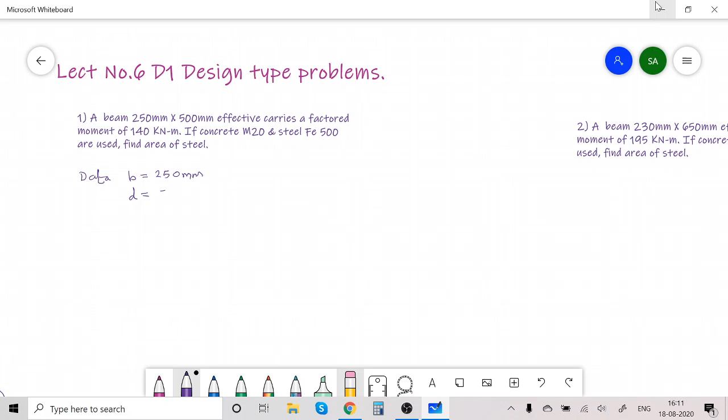Now in the first problem, it is given that a beam is 250 mm by 500 mm effective. So data: B equal to 250 mm, and as the effective depth is given, we will write small d equal to 500 mm. It carries a factored moment of 140 kilonewton meter. M20 grade concrete, that means FCK is 20 Newton per mm square, and Fe 500 means Fy is equal to 500 Newton per mm square.

The requirement is to find AST, area of steel on tension side.

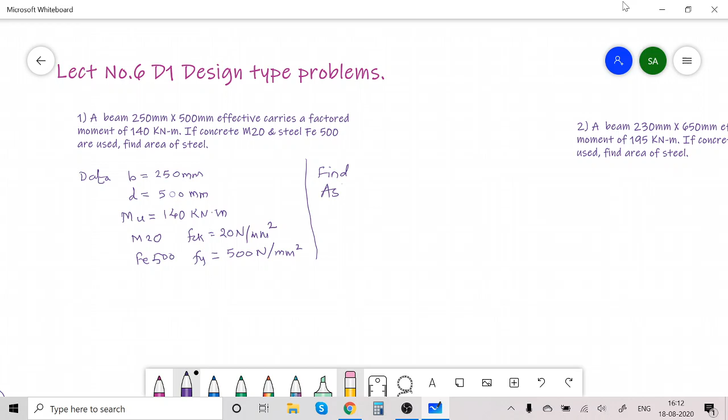Now, first job is to check whether the given section is carrying moment, that is 140 kilonewton meter, less than mu max or not.

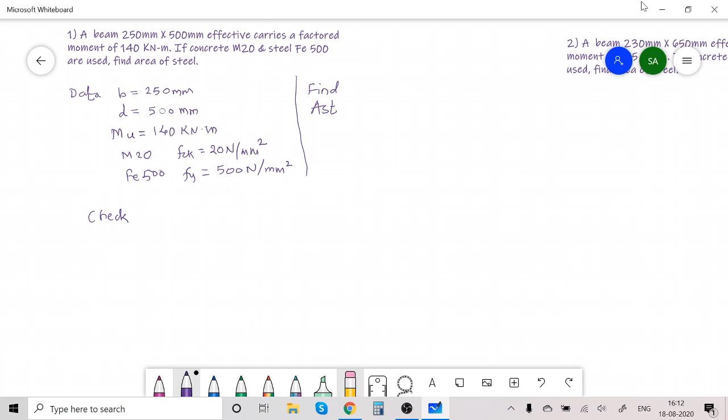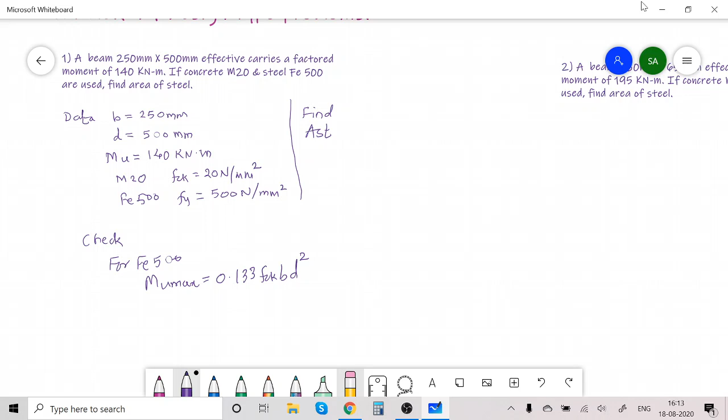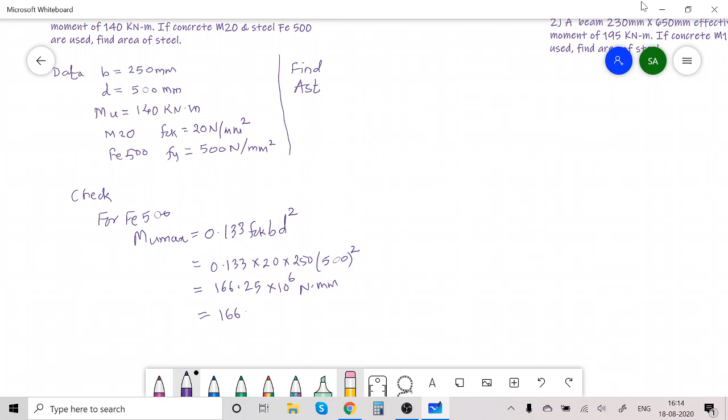For Fe 500, the value of mu max is 0.133 FCK BD square. This is the design constant for moment that we derived in our second lecture for Fe 500. Substituting the values, 0.133, FCK is 20, B is 250, and D is 500 mm square. After calculating, we get the mu max value as 166.25 into 10 raised to 6 Newton mm, or 166.25 kilonewton meter.

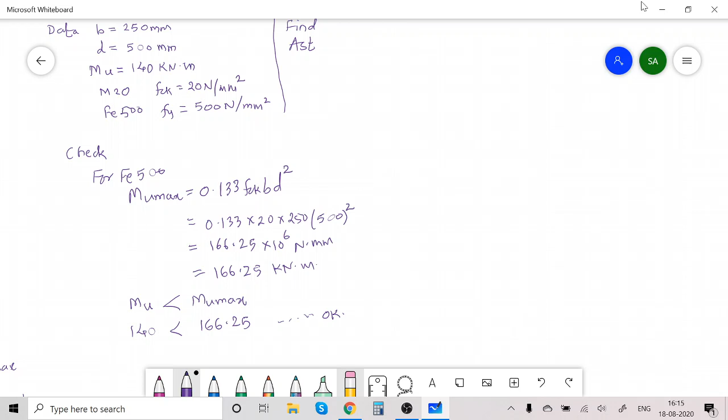Now the actual bending moment acting mu is less than mu max. That means 140 kilonewton meter is less than 166.25 kilonewton meter. So this is okay. If this mu is greater than mu max, you will have to redesign the size of the beam so that it will be under reinforced section only. Remember, the mu should not be greater than mu max. This is the meaning of mu max: the moment acting on the beam should not be greater than mu max, it should be less.

Now there are two ways to calculate AST. You can select the method that you feel easier. So method 1, I will explain the method of calculating the value of AST.

Now we know that XU is equal to, using that equation, CU is equal to TU. In this we know that 0.36 FCK XU B is equal to 0.87 FY AST.

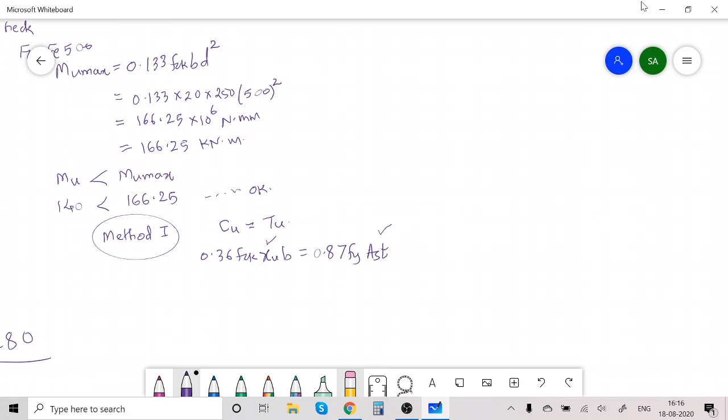Now here, as AST is not known, XU is also not known, remember, because XU value depends upon the amount of area of steel. Both are not known. So what I will do is find the value of XU in terms of AST.

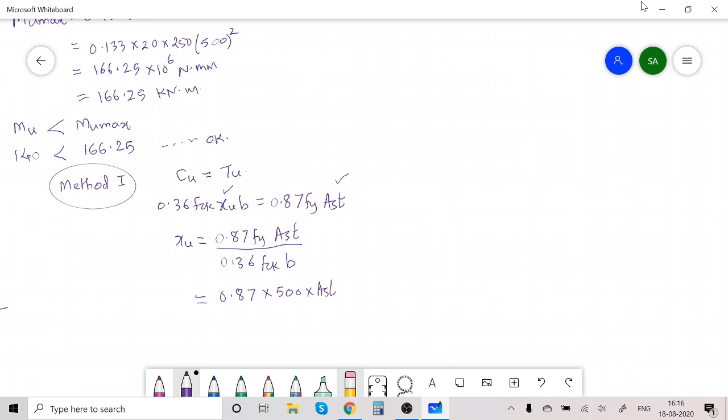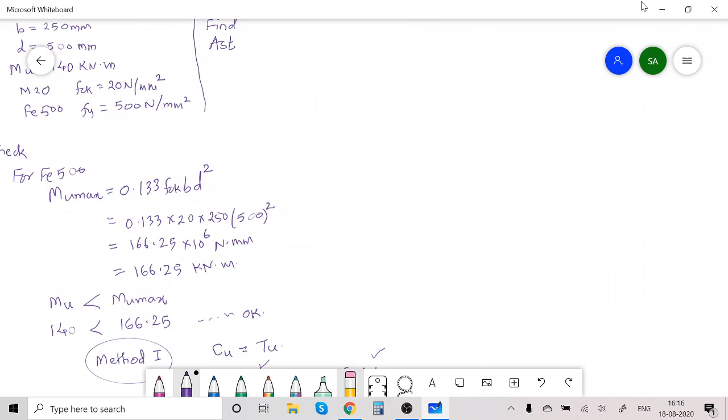So XU equals 0.87 FY AST divided by 0.36 FCK B. So XU is equal to 0.87, FY is 500, AST is not known, divided by 0.36, FCK is given as 20, and B is given as 250. So simplifying this, XU is equal to 0.242 AST.

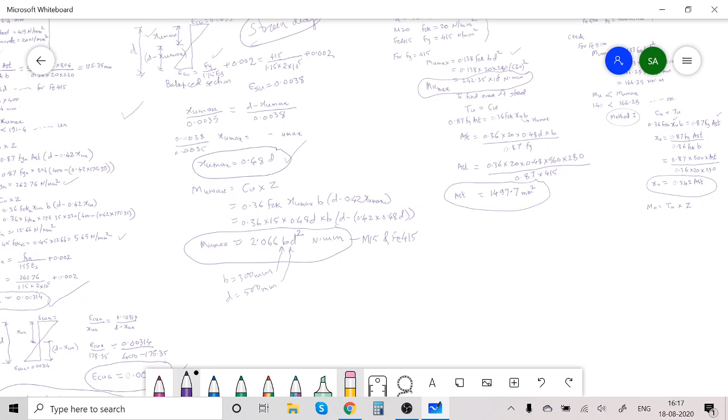Now, using this relation, mu is equal to Tu into Z. Mu, that is 140 kilonewton meter, equals 140 into 10 raised to 6 Newton mm. Remember, 140 is kilonewton meter, I am converting it to Newton mm. This equals 0.87 Fy, Fy is 500, AST into bracket D minus 0.42 XU.

So this is equal to 0.87 Fy is 500, AST is not known, into bracket D is 500, small d, effective depth is 500, minus 0.42, substituting the value of XU here, that is 0.242 AST.

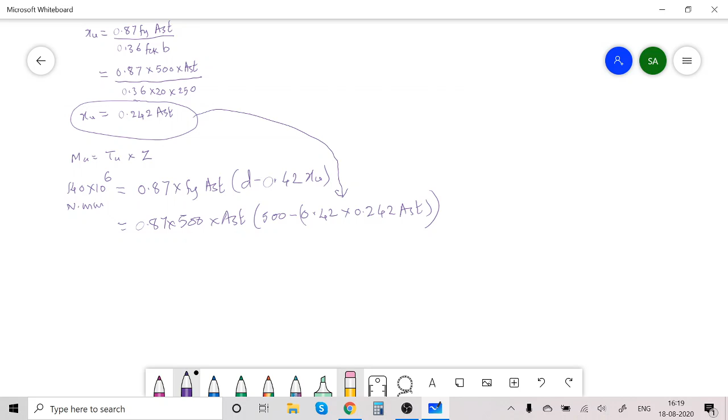Now simplify this. You will get the quadratic in AST. And after solving the quadratic, you can solve this by any method. AST we get as 761.5 mm square.

Okay, this is one method. Another method of finding AST that I will explain. This was method 1, now method 2 of finding AST.

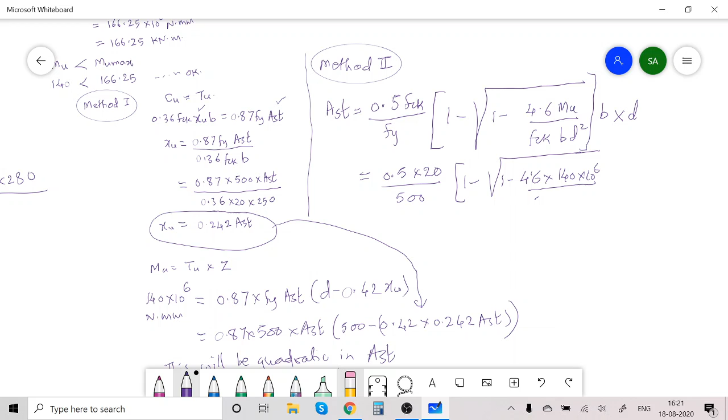In that, I will give you one formula. AST is equal to 0.5 FCK divided by Fy into bracket 1 minus square root of 1 minus 4.6 mu divided by FCK BD square, into bracket B into D. So 0.5 FCK is 20, Fy is 500, into bracket 1 minus under root 1 minus 4.6 into 140 into 10 raised to 6 divided by FCK 20, B we are having B value 250 and D 500.

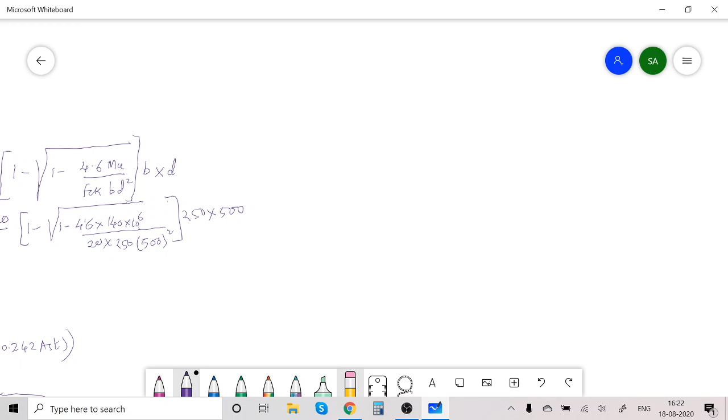B 250, D 500, bracket complete, 250, that is B into D 500 again. So this is a big formula. You will have to remember it by heart, otherwise solve the quadratic in method 1. So choice is yours. You can adopt method 1 or method 2, whichever you feel easier.

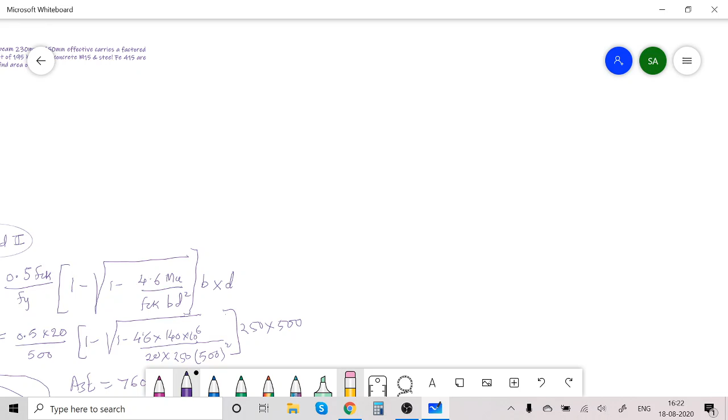So from this you get AST as 760 mm square, very near to the answer by method number 1. So this is the solution. Find the AST. I will solve one more problem for you.

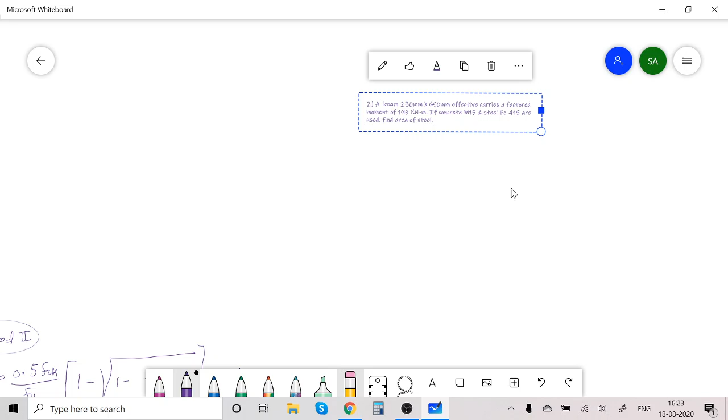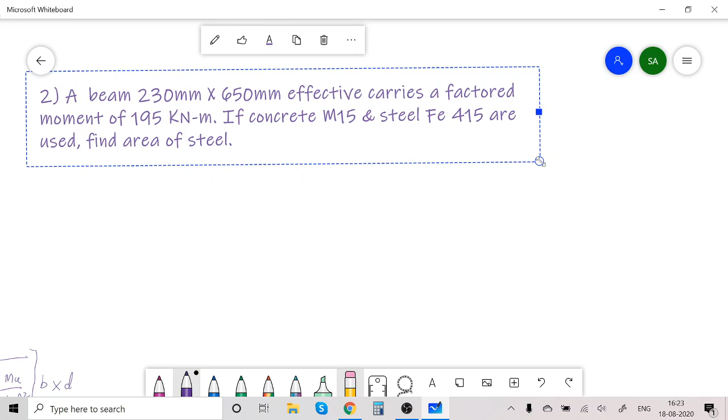Now in this problem, okay, now similar problem, only the values are changed. Now data given: B 230 mm, effective depth small d 650 mm, carries a factored moment of mu equal to 195 kilonewton meter. M15 and Fe415 used, so FCK is 15 Newton per mm square, Fy is 415 Newton per mm square. What is required? Find AST. Now let us start with the solution.

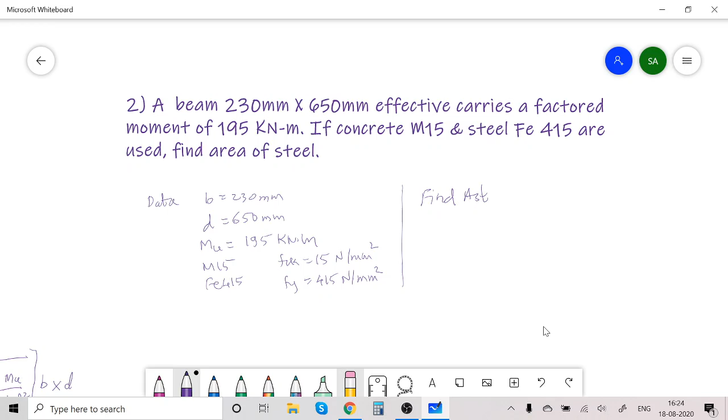First of all, check with the mu max. Now grade of steel is Fe415. For Fe415, the value of mu max is 0.138 FCK BD square. So 0.138, FCK is 15, B is 230, D is 650 square. Solving this, mu max is equal to 201.15 into 10 raised to 6 Newton mm, that is equal to 201.15 kilonewton meter. Now this mu, which is 195, is less than mu max.

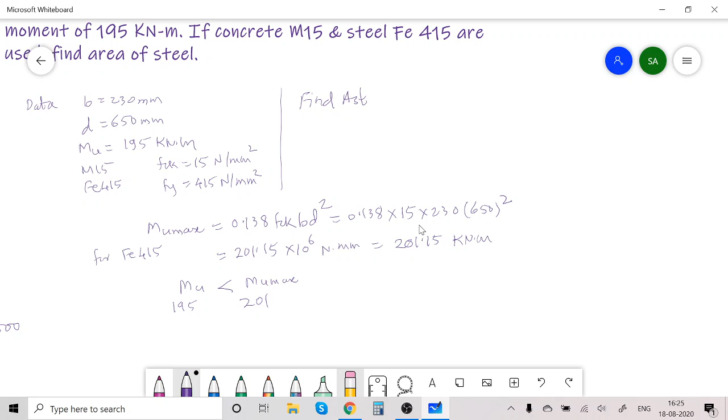That is 201.15. So okay, remember, actual mu must be less than maximum mu, that is limiting mu or mu max. Now again I will solve this problem by method 1.

In method 1, we calculate XU in terms of AST: 0.87 Fy AST upon 0.36 FCK B. So this is equal to 0.87 into 415, AST is not known, divided by 0.36, FCK is 15 and value of B is 230. So from this XU is equal to 0.29 AST. So we got value of XU in terms of AST.

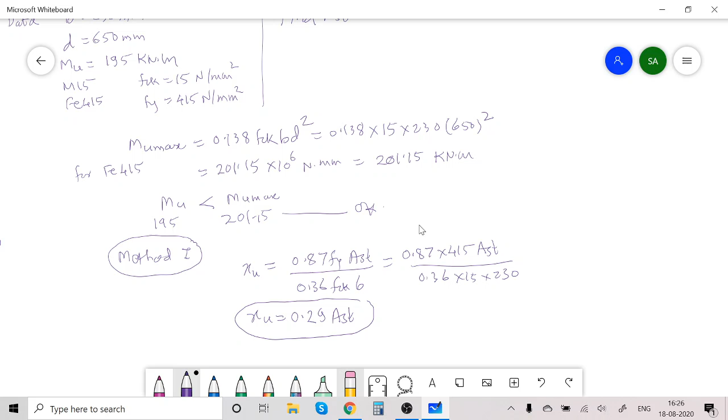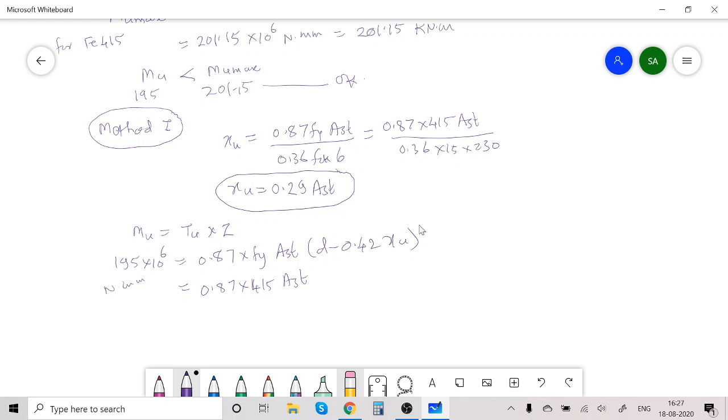Now using the relation MU is equal to TU into Z: MU 195 into 10 raised to 6 in Newton mm is equal to 0.87 Fy AST into bracket D minus 0.42 XU. So values of Fy 415, AST is not known, value of D is given as 650, and XU value is 0.42 into 0.29 AST.

Simplify this, you will get quadratic in AST. So solving the quadratic, value of AST is equal to 1027.8 mm square.

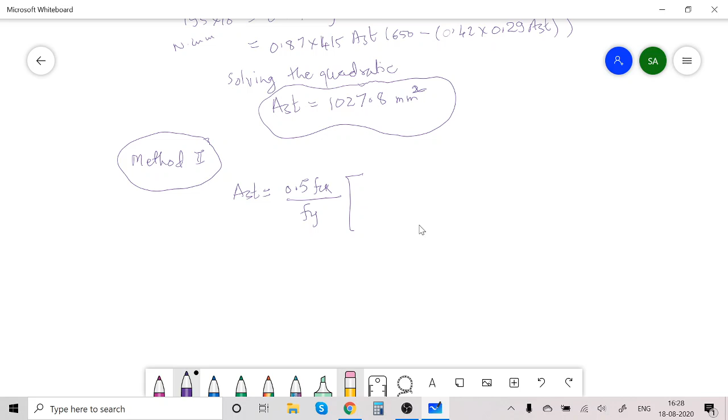Now it is up to you again to use which method, this one or the second one in which that big formula is there. Method 2, second method of finding AST: AST is equal to 0.5 FCK upon Fy into bracket 1 minus under root of 1 minus 4.6 into mu upon FCK BD square, complete bracket, into B into D. So substituting the values: 0.5 into 15 divided by 415 into bracket 1 minus under root 1 minus 4.6 into mu is 195 into 10 raised to 6 Newton mm divided by FCK is 15.

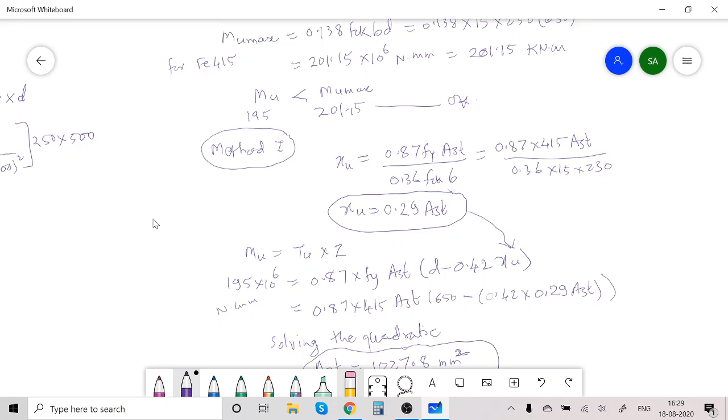B value is 230, D 650, 230 and 650. B is 230, D is 650 square, 230 into 650. So calculate this and you will get AST is equal to 1026.7 mm square.

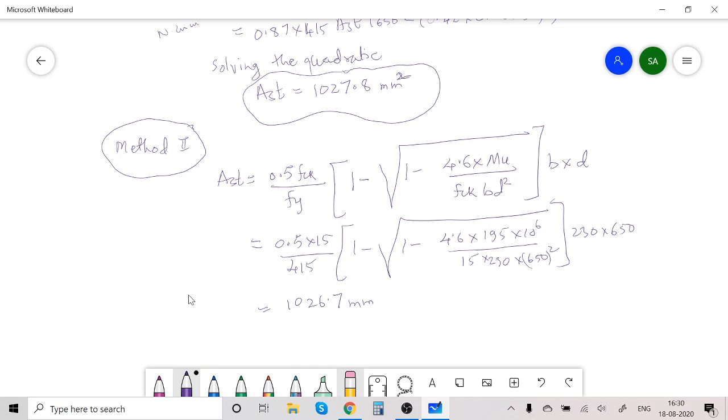So by this second method, the answer is very near to the answer we got by the first method. Both are correct. You can adopt any method.

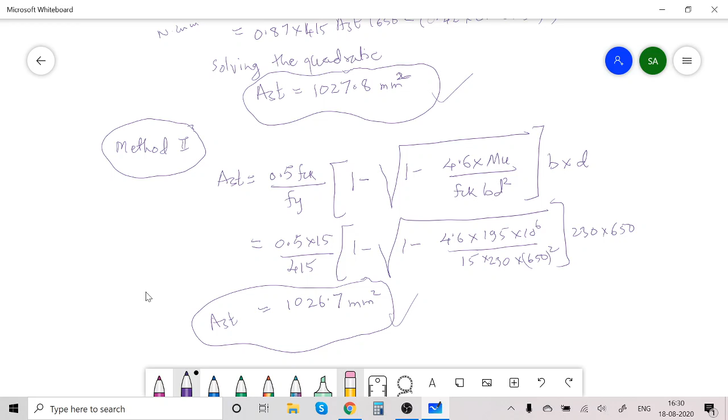So I will conclude by summarizing. See, in this type of problem, the size of the beam will be given, the moment acting is given, grade of steel and concrete is given, and the required parameter is area of steel.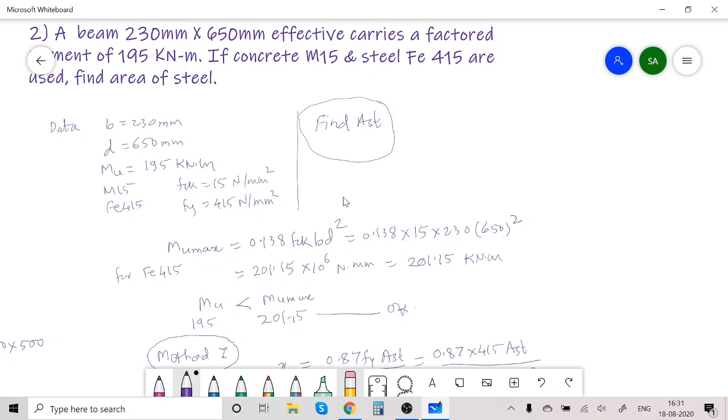Now here first step is to check whether the given mu acting on the beam is not greater than mu max. If it is less than mu max, then proceed to find AST.

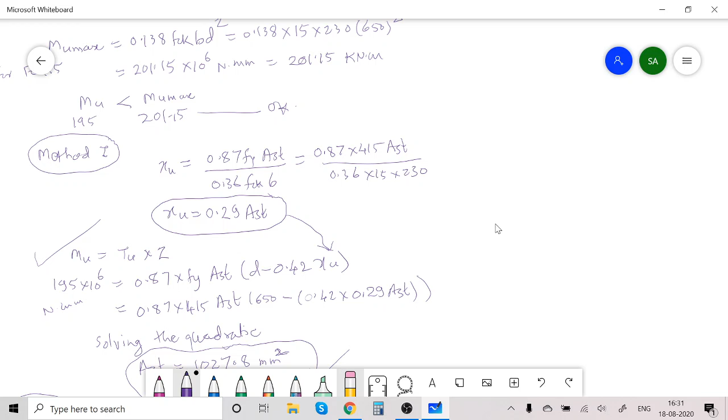The AST can be found by method 1, that is substitute the value of xu in terms of AST in the equation mu is equal to tu into z. Solve the quadratic, you will get two values of AST. Take the proper value of AST. In another method, you can use this formula to find the value of area of steel.

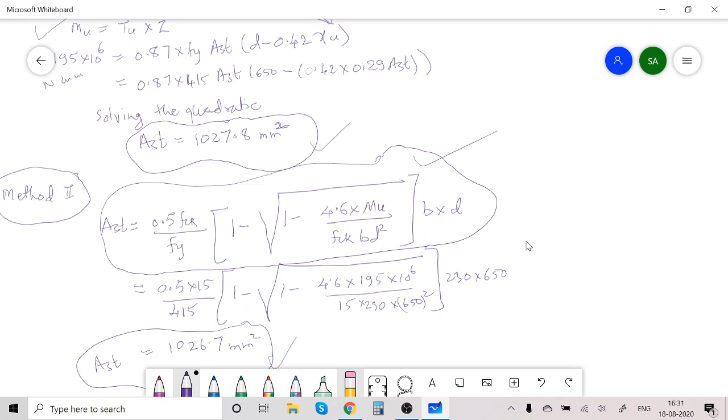So this completes our D1 type problem. Thank you.